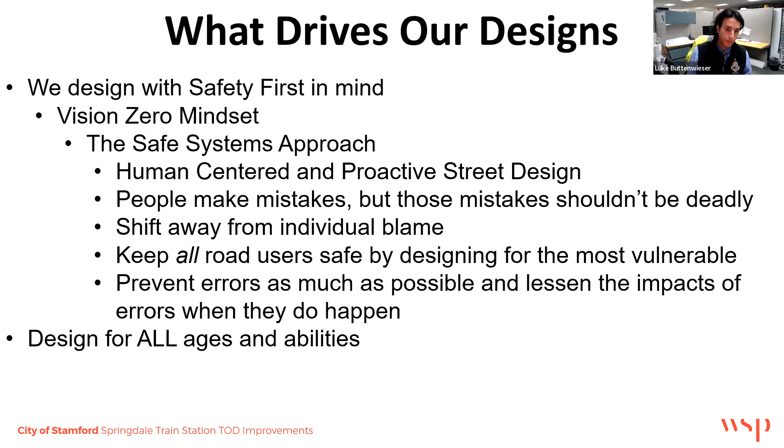What I just mentioned is backed by a lot of different city policies and plans that have occurred over the years, and these policies and plans in our design process and design thinking have gone into the overall design of this project.

In 2015, the Stamford Board of Representatives passed a complete streets ordinance, which requires that we design facilities that support all users - pedestrians, bicyclists, transit users, drivers, etc.

In 2015, we also completed the Glenbrook Springdale TOD study, which is really the foundation for this project overall. That was focused on how we improve access to the Stamford Glenbrook and Springdale village train stations. Today we're talking about Springdale, while also generally improving the two neighborhoods and environs around those train stations.

In 2015, we also completed the city master plan, a 10-year document that sets out the path and direction the city should be taking for the next 10 years.

This master plan reinforces the recommendations of the Springdale Glenbrook TOD study, as well as many other things like improving roadway safety, improving access and facilities for bicyclists and pedestrians, improving access to transit, and improving the overall streetscapes in Stamford.

In 2020, the Board of Representatives passed a shared mobility principles resolution, which calls out and seeks for Stamford and the city government to improve facilities for micromobility and shared mobility users.

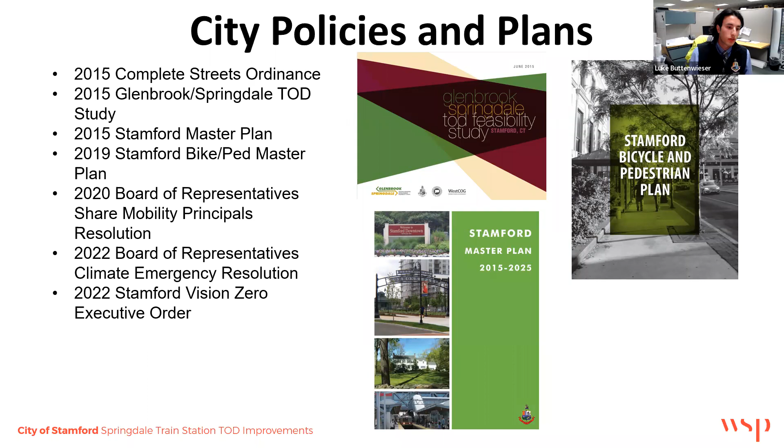Setting up the project area a little bit, we are talking about the Springdale train station, and part of Hope Street - focusing on Hope Street along the train station between Omega Drive and Largo Drive. We're on the southern part of the Springdale Village proper, near Mort restaurant, the Springdale Diner, right in the Springdale train station parking lot area. Just giving you a general idea of where we are and what we're talking about today.

I'm sure most of you are familiar with it - this is actually my station, the one I use, my family uses. So I'm an active user of it, and we're definitely invested in this project as a city and department, and me personally too.

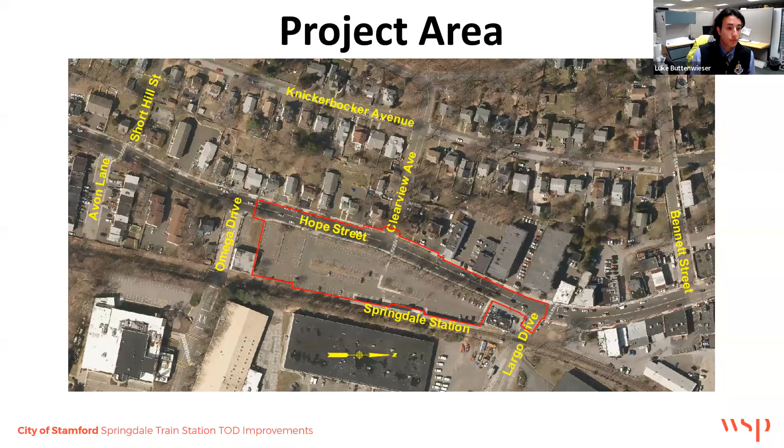So why are we here? Why are we doing this project? What's really the purpose and need of this project? We are advancing the recommendations of the Glenbrook Springdale TOD feasibility study from 2015.

As the city does its planning process through various neighborhood plans, transportation plans, and the master plan, it sets out recommendations for infrastructure improvements and policy recommendations the city should undertake. This project specifically is a recommendation from that master planning process, done with key engagement from the community, working with many stakeholders.

So we really try to advance the projects that were recommended by these different planning studies. We want to strengthen the village center along Hope Street. Hope Street really acts as the spine and the core of the Springdale village area, and we really want to emphasize that, encourage people to come down to Springdale.

Improving access to transit. So we have the Springdale train station. You can have a one-seat ride right into New York City. It's really a great asset for both Springdale and the city overall, and we want to improve access for all users to the train station.

Improve multimodal connectivity. So I just touched on that a little bit, but how do we get people to walk to the train station, bike to the train station, take the bus to the train station, and not necessarily need a car to reduce vehicle dependency.

We're realigning the Springdale train station parking lot entrance to Clearview Avenue. So that's safer, first and foremost, and improves ingress and egress from the train station parking lot. We're also improving just the parking lot circulation as well.

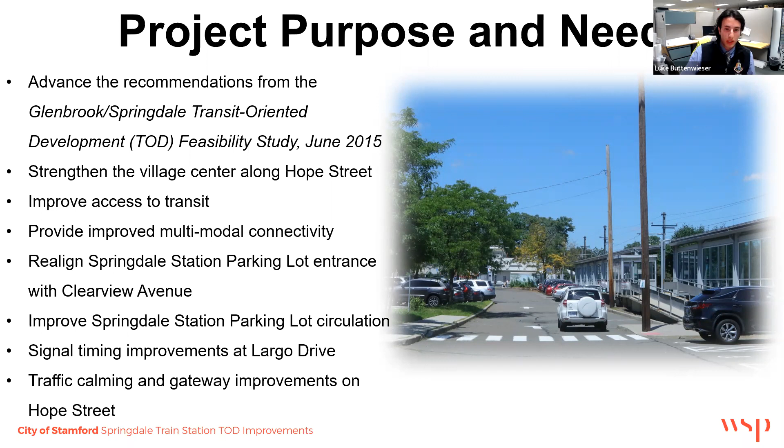So what we hear from the community, these are different things that have come from different studies, as well as just emails, Fix It Stamford requests, and phone calls that our department receives.

Speeding on Hope Street is a large complaint we get. We get a lot of complaints about speeding generally in the city. Speeding on Hope Street in particular has been an item that we've been hearing a lot recently.

Difficulty crossing Hope Street at Clearview Avenue. We do have a crosswalk right there at Clearview. There is, it's called an RRFB, but it's the button you push and it flashes the lights near the crosswalk sign. But pedestrians have mentioned difficulty crossing there, cars not stopping for them.

Streetscape improvements on Hope Street, specifically on the sidewalk. It's not ADA compliant, it's a little deteriorated. Making the station fully and safely accessible for bikers, pedestrians, and vehicles. That's directly from the recommendations of the Glenbrook Springdale TOD study.

And improving the pedestrian and bicycle network. That is from the city bike ped master plan. I believe I missed that in the city policy and plan section, but in 2019 we completed a bike ped master plan that really sets out the vision for improving pedestrian and bicyclist facilities and access throughout the city, and then improving and expanding the sidewalk networks throughout the neighborhood as well.

So we take what we hear from the community, we have our policies and plans, we have resolutions and executive orders from our elected officials, and we take all of that. We have our master plans, we take all of that, and then that's how we kind of work on developing our designs. Next slide, please.

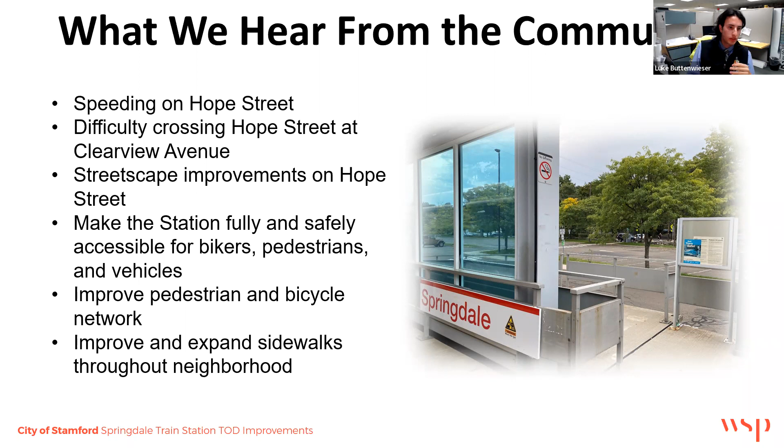So I mentioned a lot about the Glenbrook Springdale TOD study, but these are some recommendations from that study itself. Again, the city has this very in-depth planning process where we work with the community. For instance, I believe the study actually had six community meetings, improving station access for all users, and really improving the train station parking lot itself. These are directly pulled from that study.

So some things you can see here is both studies called for realigning the main vehicular entrance with Clearview Ave, having a specialty paved intersection at Clearview and Hope Street, adding more street trees, redoing the sidewalks along Hope Street, redoing the parking lot circulation, adding some bicycle parking, improving the Kiss and Ride, a new bus shelter, improving the driveways, and really improving the sidewalks.

This concept plan developed from the study is really the jumping off point as we go into the more formal design process. With that, I'll pass along to our design team at WSP, who will speak more to the designs themselves and how we jumped off from the planning process that the city conducted.

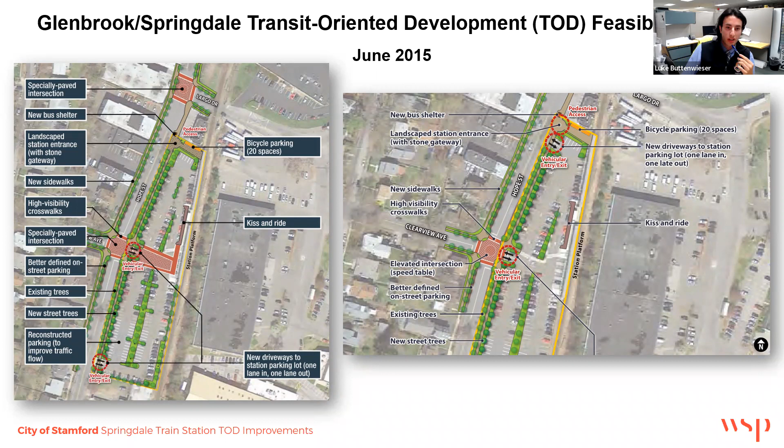Thank you, Luke. This slide shows the overall improvements proposed along Hope Street and within the station parking lot. Our first steps in developing this design were: one, we looked at the 2015 Glenbrook Springdale TOD study that Luke mentioned; two, we looked at all city policies and plans; and three, we performed a detailed traffic analysis.

During this process, we looked at various options and configurations that were recommended in the previous study, and we also had several coordination meetings with the city. Through that process, we developed this design that you see here on the screen.

One of the main differences with this design over the previous recommendations is having just a single entry and exit point at the station parking lot, aligned with Clearview Avenue. The previous studies looked at having this same access point along with another entry and exit point, one option to the north of Clearview and another to the south. Based on a traffic analysis and considering safety along Hope Street, the final recommendation was to have only a single entry and exit point.

By not having that second entry and exit point, it makes travel along Hope Street safer, by reducing the number of conflict points. In addition, these second access points previously recommended would have been located in close proximity to either Largo or Omega Drive, which would only cause further potential for traffic-related issues.

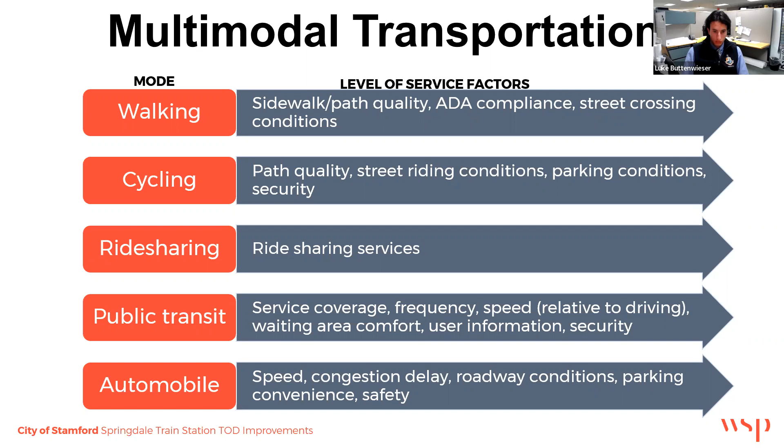As Luke mentioned at the beginning of our presentation, we design our facilities with safety first for all roadway users, so it's really the forefront of our planning and design work. We are also focused on improving mobility for all roadway users, including pedestrians, cyclists, public transit, and vehicular traffic. Lastly, we are providing an improved multimodal access into and out of the Springdale station for all modes of transportation. Pedestrian, cyclist, and vehicular traffic are all part and parcel of making sure that they're accommodated safely and efficiently into and out of the station.

As with many transportation planning projects, one of the first things we do is establish a baseline condition, looking at the existing condition that's out there. As part of our study, you may have already seen some of our folks out there. We've been collecting traffic data on the roadway system, looking at crash history on the study area roadways, and looking at transit, bus stops, and ridership.

So all that information is going to build into the safety and operational improvements. As much as we are concerned with the existing safety condition, we are also looking at the future condition, when the Springdale TOD project is fully completed, and the number of additional riders we will experience at the station, and the vehicular traffic that's going to be generated on the roadway system. Those are all under future condition operational analysis that we look at, and we design the roadway system to support all modes of transportation.

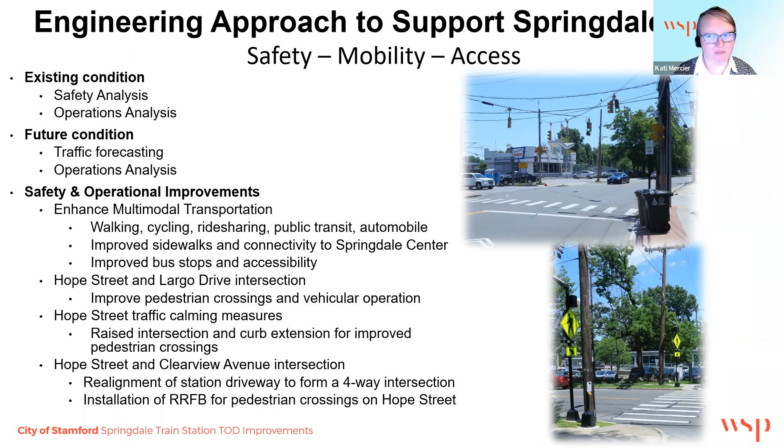So this is a slide that we've already shown, but I just wanted to show you again the big picture of the project. And then I'm going to dive into 4 different areas.

We're going to talk first about the intersection. At the main intersection, we are looking to realign the driveway intersection with Clearview Avenue at Hope Street. You've heard a few people mention a raised intersection—what that means is vehicles will have to cross a very long speed bump, if you will, through the length of the intersection.

For pedestrians, very similar to the Stamford station picture on the left, the crosswalks will be in painted, imprinted bituminous asphalt, and those will be level from the sidewalk across the intersection to the opposite detectable warning area for ADA accessibility requirements.

The intention of the raised intersection is to help slow the vehicles. Another aspect of this raised intersection is what's called bump outs or curb extensions. We're going to take where the existing curb lines are and angle the curb out into the roadway on Hope Street, on the eastern side—north is oriented to the right here.

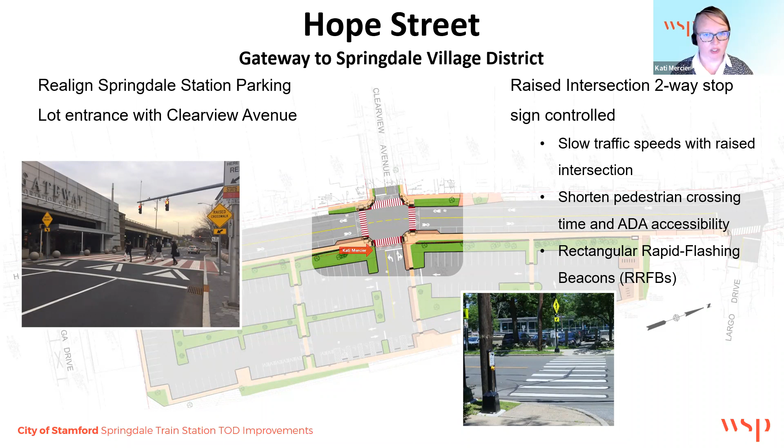Now we're going to talk about the remaining portion of Hope Street. Along Hope Street, many of the curb lines beyond the limits of the intersection are going to remain intact, in line with what you experience out there today.

We are going to be closing the intersection that is currently located—the parking lot driveway—that will be closed, and new curbing will be placed there. These will remain as parking spaces along the eastern, northbound side of Hope Street.

We are going to continue to maintain the bicycle sharrows, which are pavement markings you have probably seen throughout town—the bicycle symbol with the 2 arrows pointing forward, used to indicate that vehicles and bicycles are sharing the lane. Hence the term sharrows, with the sharing of lanes.

We did investigate whether bicycle lanes would be an option as we looked at our concepts, but the space just wasn't available within the right of way for this location.

We are looking to continue to maintain the existing stone wall and the landscaping that already helps to define the Springdale station. We'll be utilizing some of those stones from the stone wall where we're placing the new driveway entrance.

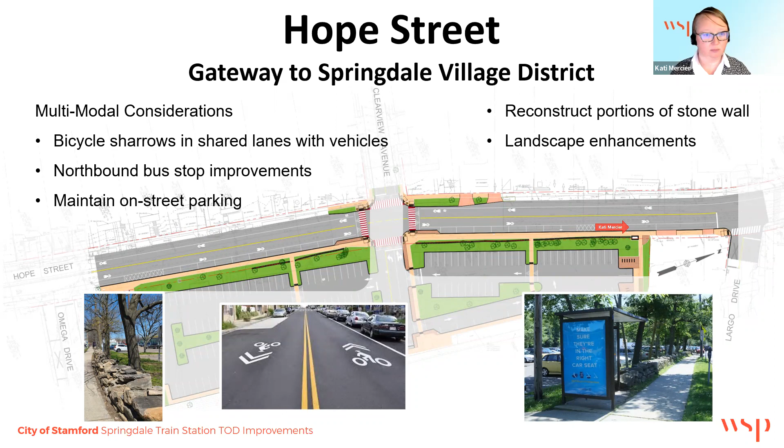Moving on to the next slide, I'm now going to talk about the parking lot on the north end. We are providing 3 pedestrian entry points into the parking lot on the north side. The first one is at the bus shelter I just discussed, one at the center, and then one at the intersection.

In these graphics, the green represents grass or other landscape type areas. The gray is the bituminous. The light cream tan color is going to be the sidewalks - not necessarily saying they'll be that color, this is just a graphical representation so it shows on your computer screen. The more burnt brick color is an opportunity to have some imprinted and stained concrete, some pavers, that sort of decorative elements. And the dark line here is the stone wall we're talking about.

So at the Kiss and Ride, we are going to be increasing it to 5 parking spaces and also shifting it into the parking lot. By shifting it into the parking lot, we'll be able to provide an ADA width sidewalk on the passenger side of the vehicles.

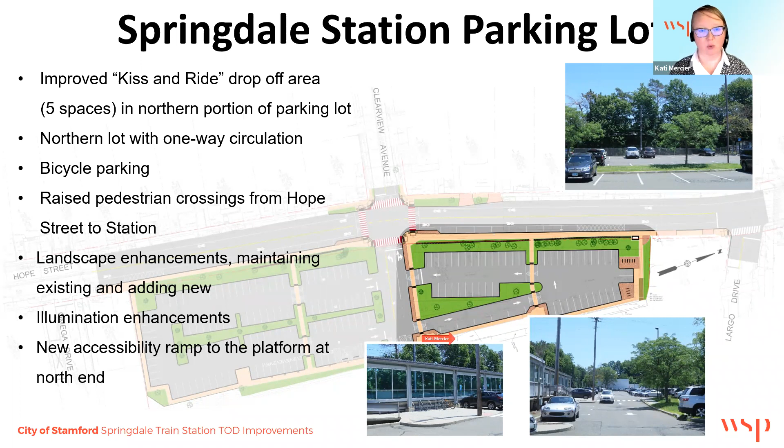Moving on to the next slide. The south parking lot, the left-hand side of your screen, really has the biggest difference in the parking lot layout. As Luke mentioned previously, the existing day lot at the far south end of the parking lot has very tight spaces. We are looking to eliminate that, as well as the existing entrance.

So the existing entrance, if you look at my colorful graphic, is right where my new red arrow is placed on the screen. That's the existing entrance that we will be closing off, and we'll be providing a more traditional two-way circulation through the entire portion of that parking lot, as well as lengthening and providing more central green space and landscaping in the center of that parking lot.

Similar to the north side, we'll be providing a raised pedestrian sidewalk to connect from Hope Street to the east side of the parking lot, and we'll be providing the required ADA parking spaces, handicap parking spaces in the lot.

As well as electrical vehicle parking. As an electrical vehicle owner myself, I'm very excited to see when municipalities are really excited about providing electrical vehicle parking. So I really thank the city for considering that and offering it to begin with.

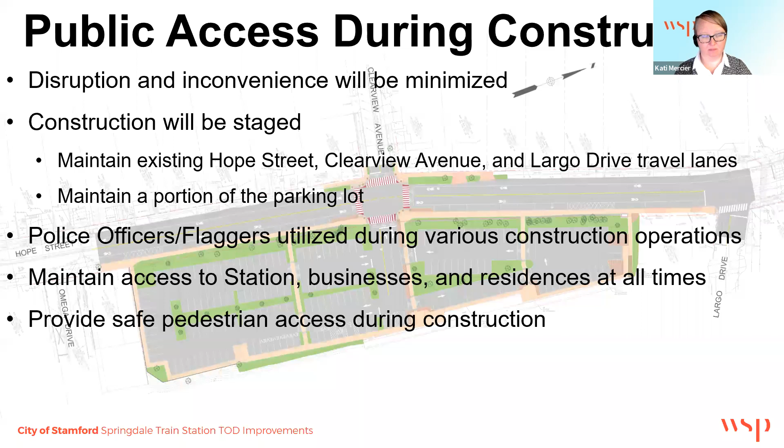By doing it this way, this will allow for continuous service for the commuters and other users throughout construction. Additionally, during construction operations, we're going to be utilizing police officers and/or flaggers as required to direct traffic. Also, access to the station, businesses, and residences will always be maintained during construction. And lastly, safety is important, so providing safe pedestrian access and access for all users will certainly be maintained during construction. We can move on to the next slide, please.

There are other impacts that we're anticipating, and I'll walk through those now.

In regards to rights of way, we do not anticipate any right of way acquisitions, takings, or easements for this project. However, we anticipate some temporary impacts along Hope Street on the northern side by Clearview Avenue, where there's work adjacent to properties. The contractor may need rights to grade and reconstruct where they're tying in driveways and sidewalks, but these are minimal and only temporary impacts to improve the area.

In regards to drainage, there are minor drainage modifications proposed along Hope Street, mainly at the raised intersection. We anticipate maintaining the existing drainage trunk lines and making adjustments to catch basins in the area so things drain properly. Within the parking lot, we again plan on maintaining the existing trunk lines, but we anticipate modifying and relocating some inlet structures based on the parking lot reconfiguration.

There are utilities throughout the project limits: electric, water, sanitary, and gas. We are not anticipating any utility relocations with this project; however, we will have full coordination with the utility companies as we move forward with the design process.

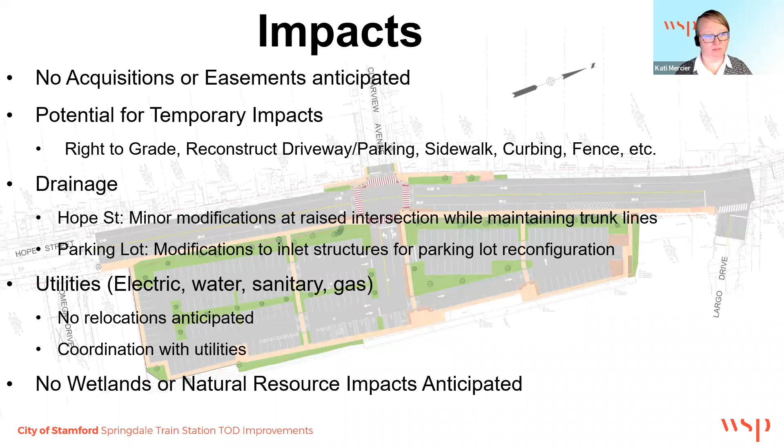In regards to natural resources, there are no wetlands or natural resources located within the project area, so we do not anticipate any impacts as part of this project. If we can move forward to the next slide, Grant.

Finally, the project schedule as well as the construction schedule. What we presented here tonight were conceptual level plans, which was what we were working on in the earlier part of 2022. Where we're at now, we have this public information meeting today.

Following this public information meeting, we will be moving forward with preliminary design, and then final design. We're anticipating design to be complete prior to June 2023. We do expect to come back to the public again to present a more detailed plan.

As far as construction, we're anticipating construction to start in fall of 2023, with construction completion in 2024. We also anticipate another public information meeting prior to construction so we can inform the public of the anticipated construction schedule and scheme.

That concludes our presentation for today. We'd be more than happy to take any questions that you may have.

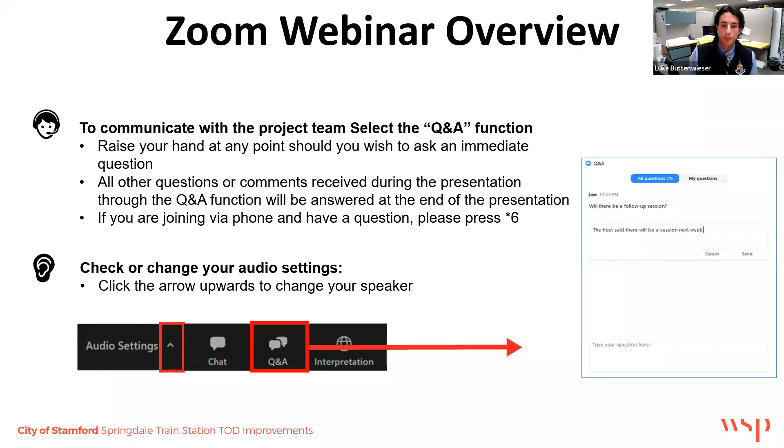There's a question, where can these plans be viewed? We will be posting the recorded webinar, the presentation, and project plans on the city website. My contact information, as well as the Transportation Bureau Chief Frank Petise's contact information, will also be on the website. There's mine right there. We'll be more than happy to respond to any emails or phone calls related to questions about the plan.

Does this plan have to be approved by Board of Finance or Board of Reps? So the project, all the funding—this is a state-funded project, about a $2 million grant. I believe all the funding has been approved by the Board of Reps, but that was about a year or so ago. From my understanding, and I can double check this with my manager tomorrow, there's no approval required for these plans, as the project itself and the funding has already been approved and the grant has been accepted by the appropriate boards.

Has the city considered adding speed cameras on Hope Street? Within the state of Connecticut, speed cameras are actually illegal at the state level. So we are not authorized to use speed cameras anywhere in the state of Connecticut, and on the city level they are illegal as well. So even if the state does legalize speed cameras, it would still be illegal and prohibited in Stamford due to existing city ordinance.

I like the raised crosswalks in the parking lot and the intersection, they're great at the Stamford and Port Chester stations. Thank you. We think that, we use this on North State Street right in downtown, and we think it really helps with ADA accessibility as well as traffic calming in the area.

So the question, Clearview is a very busy intersection. There'd be significant bottleneck at peak hours with entry, exit into train station and local residents accessing Clearview. There really should be additional exits.

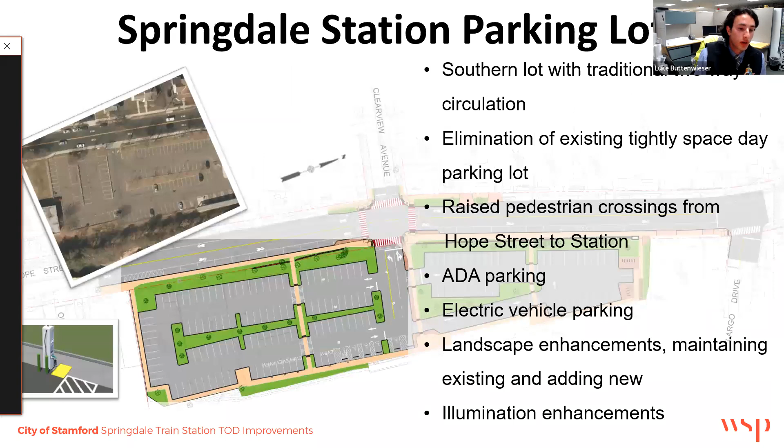In relation to the sidewalks, I believe currently - could you pull back up the concept plan? I believe we're going all the way up to Largo. Depending on budgeting and what city funds we have, we could look into extending and redoing sidewalks in other parts of the area on Hope Street, on the west side. If we have available funds for that, I think that's something we can definitely look into as we work on design.

So we have two raised hands. Lenka Burke - I think I just have to give permission to talk, right Grant? Yeah, I just gave that permission. Thank you, Luke. Okay, so Lenka, I believe your hand's up. You're available to talk.

So you asked a question in the chat about the pedestrian overpass. There's a question about having a pedestrian overpass at this location.

There's been a lot of studies done on pedestrian overpasses, and they've shown that they're not actually very safe, as it's a significant burden on pedestrians to go up escalators, up 18 feet in the air, or up elevators and all the way down to the other side. It's really not walkable. It's not pedestrian friendly.

It's a significant maintenance expense too, as well as right-of-way concerns if you're going to have the elevator or switchbacks to get up and over the roadway. So it's really not something that's very feasible at this location or in most locations in an urban environment. You have them over highways usually, 6 to 8 lane freeways, but you wouldn't have them over the road here.